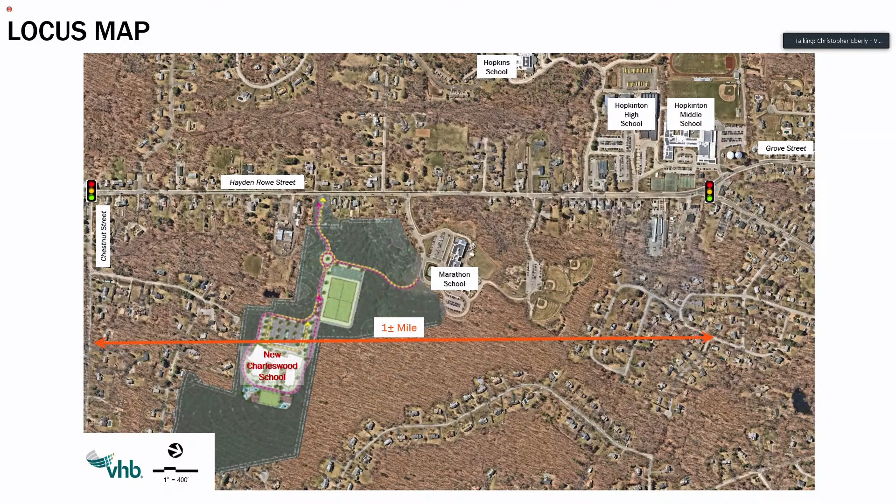If we can go to the next slide, please. Out of that process was a very focused review of the intersection of the Marathon School driveway and Hayden Rowe Street. We picked this intersection specifically because it's already serving the Marathon School, and when you look at the site plan for the overall project for the new school, we are looking at a cross connection between the two schools. So traffic doesn't necessarily need to leave one driveway and access the other school from Hayden Rowe Street—you could travel between the two schools via that internal connection.

That internal connection provides the ability to add additional traffic control at the location along this corridor that provides the most benefit for traffic flow on Hayden Rowe Street. You could consider a signal only at the new school driveway, though there are technical limitations for that. Based on our previous analysis, we determined that a change in traffic control at the Marathon School driveway would have the most benefit for traffic associated with both schools, while improving traffic flow along Hayden Rowe Street and pedestrian safety.

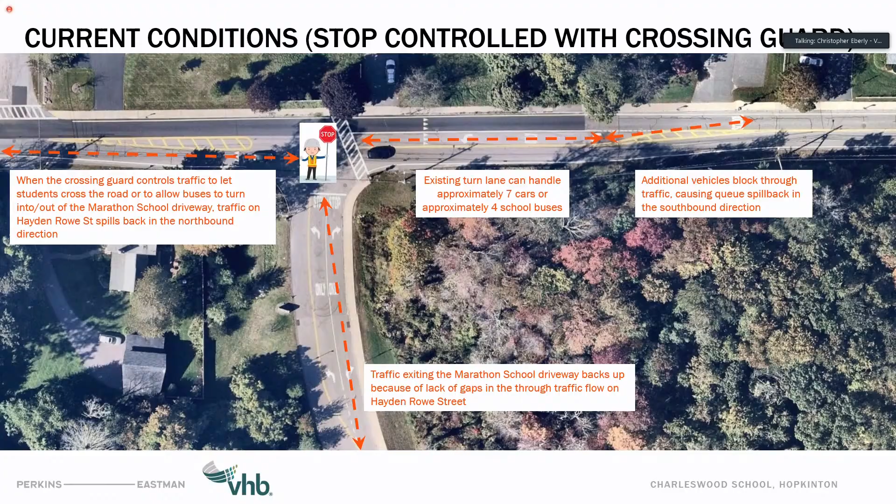There are a few other things we observed, and some of this is built into the traffic study we submitted back in July of last year. Item A is what I just mentioned—the left turn lane is inadequate.

With growth in student enrollment across the entire district—close to a 50% increase in projected enrollment over the next 10 years—there will be more school-related traffic on Hayden Rowe Street, and an increase in traffic just for Marathon School. Those future traffic volumes would need to be accommodated with whatever solution we come up with.

For the new school, rather than just relying on a cross connection and access to the Marathon driveway, our analysis established a need for an additional, unsignalized access for the school. That was one of the things we found with the traffic study.

There's a need for pedestrians to have a safer, more convenient crossing opportunity across Hayden Rowe Street. Today the full signals are a mile apart at either end of this graphic. So if a pedestrian needs to cross at Marathon School today, they'd have to activate the push button for the flashing light. It's not active control—traffic just has to follow state law and yield to pedestrians, but there's no requirement for vehicles to stop. You often see that happen, especially during off-peak hours, when traffic travels at higher speed along the corridor.

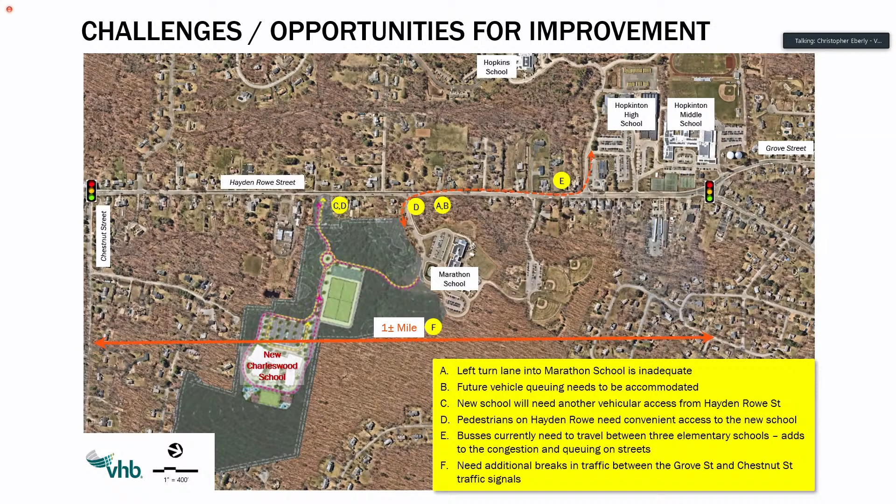So some of the other things we took into account when developing recommendations as part of the traffic study are listed here. For example, you hear the concern that school traffic is causing some of the congestion and backups.

But when you look at Charleswood School, or previously the Elmwood School, traffic start and end times, that's not when traffic on Hayden Rowe Street peaks. Hayden Rowe traffic actually peaks earlier in the day, in the morning, and earlier in the afternoon, when high school and middle school traffic is at its peak. So by the time elementary school traffic comes out onto Hayden Rowe Street, it's actually the churning traffic in and out of driveways that causes congestion, not necessarily just the volume of traffic.

So a solution that helps manage that churning traffic better would have a beneficial impact on the overall traffic flow on the corridor.

The second bullet talks about how, occasionally during off-peak hours, if a resident is turning off Hayden Rowe Street into a driveway or onto a side street, that wouldn't have a significant impact. But with multiple cars, tens of cars trying to turn into each of these schools, that congestion builds up and the queues spill out up and down the corridor, causing additional congestion.

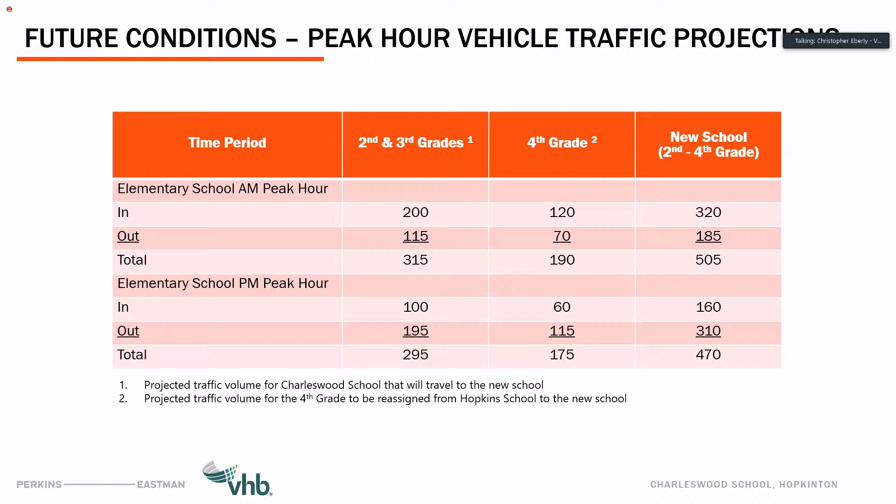Those numbers are pretty substantial, and that's what we're trying to accommodate with our traffic improvements. All these numbers on this slide are future projections going out 10 years, so these are not current numbers—they're future growth projections that include that 50% growth in enrollment.

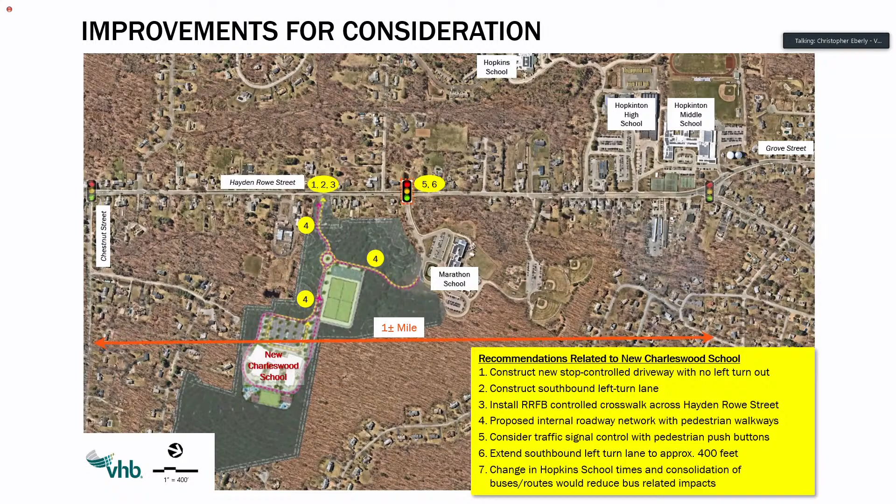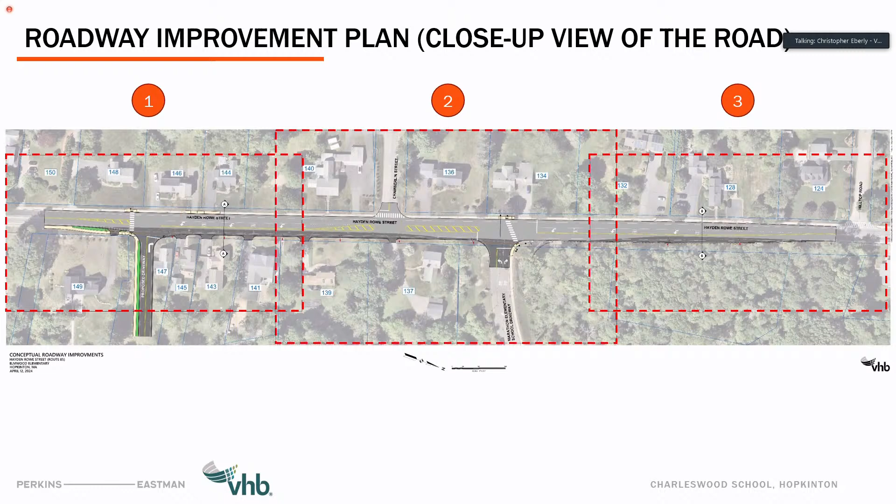If you go to the next slide. To get a better understanding of what these improvements look like, we broke up the plan sheet into 3 different segments, 1, 2, and 3. We'll quickly go through each of those areas. Segment 1 is near the new driveway, Chestnut Street to the left and Grove Street to the right of this slide. You'll see it's a right turn out only driveway coming out of the new school.

There's also a new left turn pocket shown on Hayden Rowe Street that would keep traffic wanting to enter the new school outside of through traffic, so through traffic would not be blocked by traffic turning into the new school.

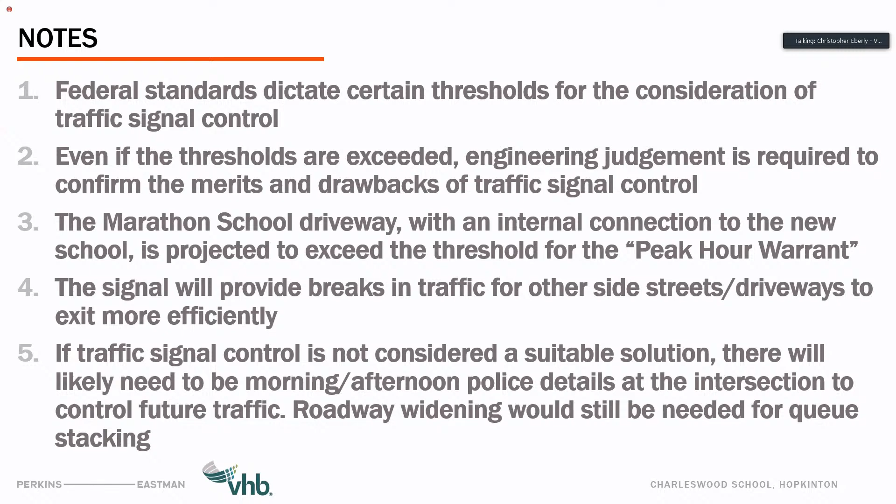If you can go — I think it's the next one, Chris — site layout. So you're talking about the roundabout and the cross connection to Marathon School versus coming out at the new driveway. Correct. So what percentage of our Charleswood students do we think live south? It's not just traffic living south — I guess it's also work traffic, right? Parents drop off the students and then they come out, and they're not going back home, they're going to work.

We looked at that extensively during the traffic study, not only for Marathon School but for all the school driveways up and down the corridor. What we identified is a 60-40% split — about 40% of traffic is oriented south, and 60% is oriented north towards Main Street. So when school lets out, the 40% heading say toward Forest Drive would come out and blend with 100% of Marathon traffic — they're probably not going to go through the connector, even to go right. All the Marathon traffic and some percentage of Charleswood traffic will come through together.

We did run more recent analysis as part of the site plan development for this project and spent quite a bit of time on it. I didn't get into that in this presentation since it was mostly about Hayden Rowe Street, but we looked at the geometry of each of the internal roadways. When you look at the site plans submitted for the project, you'll see turn lanes, flares, and widening — there are geometric variations, not just two parallel lines defining the edges of those internal streets. There's actual geometry on those driveways to accommodate the estimated traffic flow between the schools.

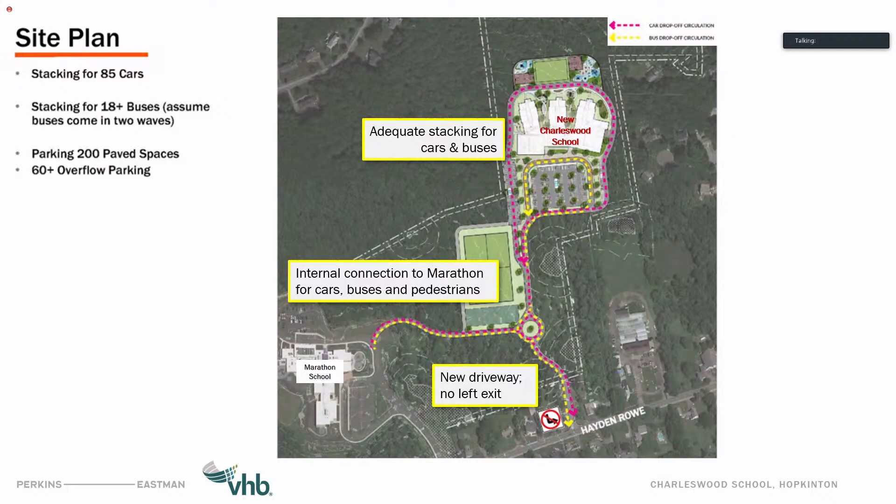Chris, if you could go back to that slide that shows the middle section. So you're talking about that yellow striped area in the middle? We did a great site walkthrough today, but this left-hand turn lane into the new entrance is a concern of stacking there, and if you were to use those dashed lines, that seems quite cumbersome. So it's a little out of my league in terms of knowledge.

Right now we don't see, at least based on the projected analysis, a need to stripe that yellow splashed area for a turn lane, and that's why we're showing it as gold and not as a turn lane. The time when that left turn at the new driveway gets used is, let's say, there's a long line of cars of parents going to the main school, and car 5 or 6 is heading to the new school. They don't necessarily need to wait at the signal to turn into the signalized intersection and use the cross connection. They can use the through lane and then use the left turn pocket farther down to enter the new driveway.

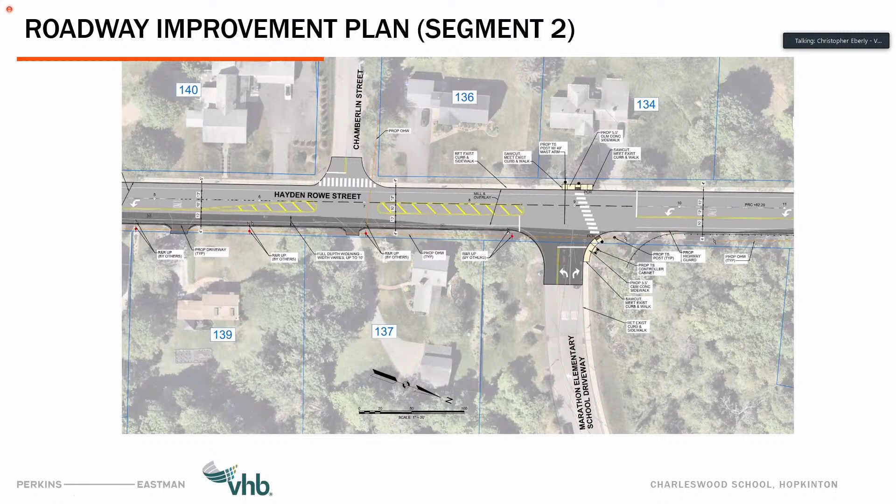The new one would be more than doubling that, about 130 to 150 feet today, the new length north of the signal. Comparing the present day at 5 to 6 cars to the proposed design of the new entrance at 8 cars - it's more than 8 cars. I think it was 8 cars on this side, Vinod. I think this side's 20, isn't it? Yeah, it's much longer. At the signal we'd have a much longer turn lane since that would be the first preference, but we wanted to have the ability for parents to use the unsignalized driveway if they choose. That's about 8 to 10 cars, probably more than 8, but somewhere in that order.

But it's a good amount of distance on that side, whereas this is cut in about half between the two. So it's at least 18, maybe 20 cars. For 400 feet, you're probably looking at somewhere in the order of 18 cars. Okay, so thank you, that makes a lot of sense.

Other questions on traffic as I cover for Tiffany before she becomes official chair?

We talked with the residents during the walk about the value that gives them, because one of the early concerns we heard was that going to get your mail can be quite the ordeal. By pulling back the shoulder and pulling back the mail delivery point, you can actually stand at the mailbox and grab your mail, and you've got a couple feet behind you before you're in the roadway, which is an improvement over what they currently have.

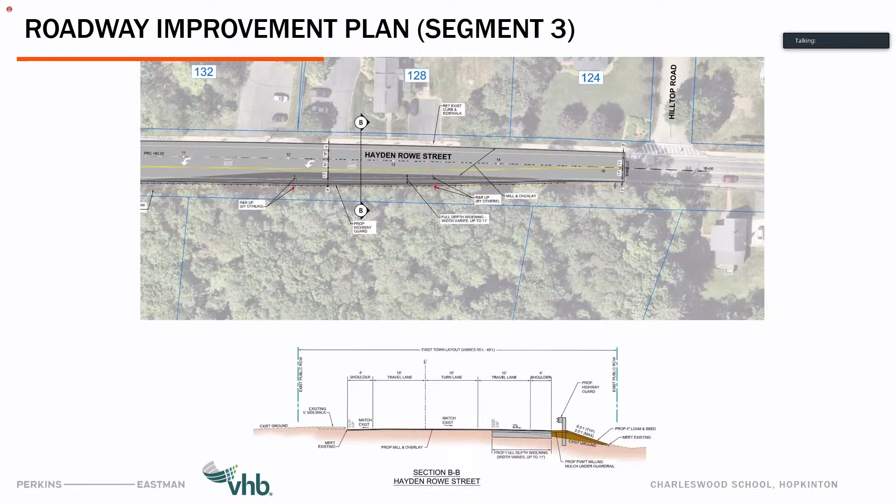Any other questions on traffic?

So our next series of items all relate to where we are in the overall project. Last week I distributed to the full committee the design development set, so you could see the design that Perkins has developed. What we're going to talk through now is where the cost estimates ended up, where we are from an overall budget standpoint, and also where we are versus where we were from a value engineering standpoint versus where the drawings are now, and some of the choices and options the committee has in front of them.

Starting with the design development estimates, we are under budget. We had AM Fogarty and PM&C both estimate the project. We met last Wednesday to reconcile, and at the tail end of that we were within 1%. That's $1 million, but that is less than 1%. So we were able to reconcile at 122,488,967 versus PM&C's 123,507,195. The MSBA has us use the designer's estimate as the estimate of record.

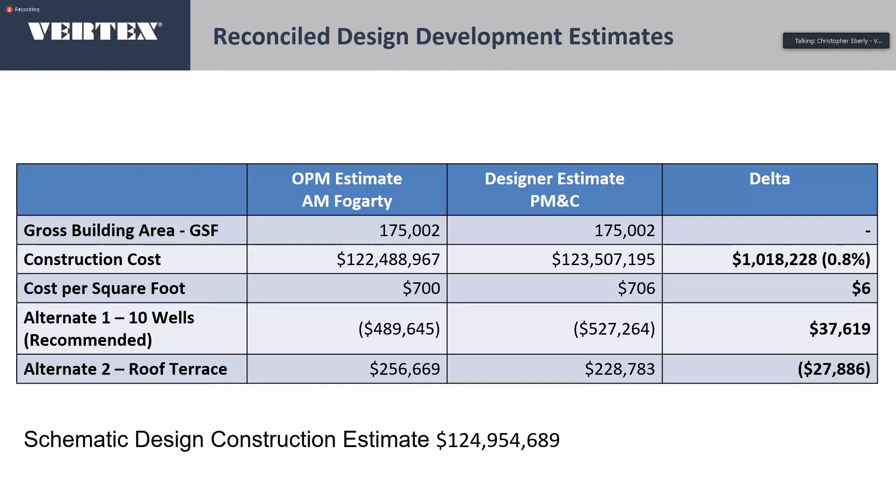So I wanted to take a look at where we were with sustainable schematic design alternates back when we were doing the value management prior to the bid. What you can see here in dark blue are the accepted alternates we made at that point.

Just to revisit those 8 alternates: we accepted wanting to try and keep the tile in the corridors, but we didn't want to raise the budget to do so. We wanted to use just stone dust at the overflow parking to save $200,000. We wanted to remove irrigation from the playing fields, and raise the grade at the playing field to use some more loam to keep the cost down.

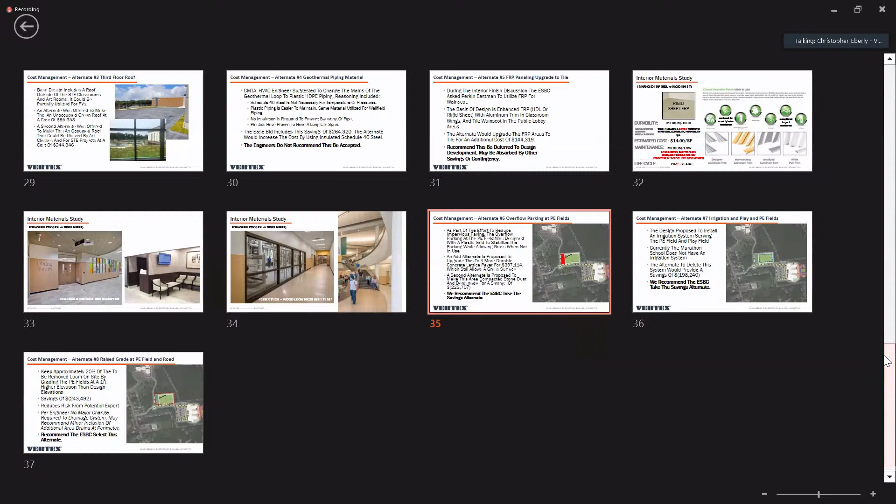I gotta move this along. What are we gonna get? There is a Bruins game. Missed one meeting. I think there's one more, so we got a solution.

The last one was restoring the additional grade. There is three feet of depth of loam that we have not laboratory tested to confirm anything about it yet. So you have a lot of loam that you need to export as part of this project.

Spent a fortune getting rid of loam at Marathon. So if we could use it here, as opposed to shipping it - it went to New Hampshire or some crazy place.

I forget, you mentioned we voted against it because of steps that would have to be added. No, you actually voted for it. And it was not included in the design. That's why we're bringing it up, because you voted for it at schematic design.

And the design kept the bid grade in what they're currently proposing. We are preparing the planning board submissions and the Concom submissions and everything else. So we want to restore that decision that the ESBC made. Now would be the time.

Does this 243,492 include the ramps, railings and all the other stuff that are gonna be required, probably needed to do this? I thought they had a way around that when we discussed it at the time, but it was never developed, so we don't know. I think you're gonna pay more getting rid of it than accommodating the increase, given the distance you have available.

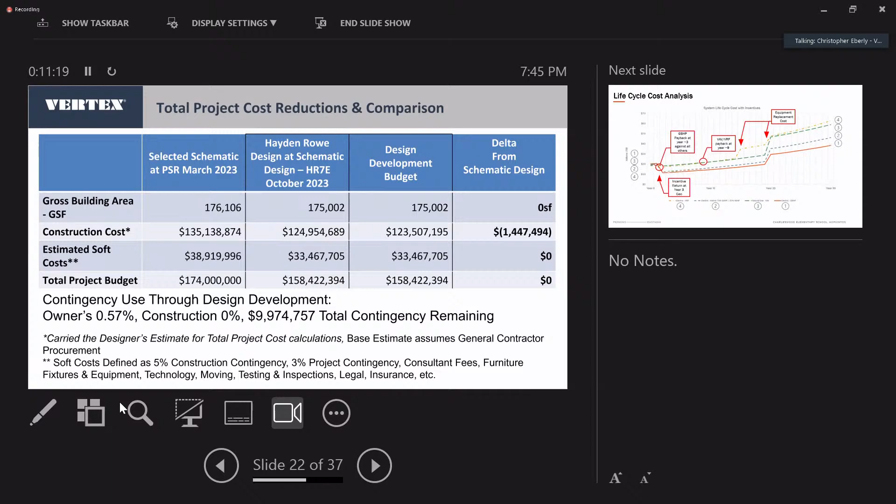Life cycle cost—this is going to be part of the DD submission, so I wanted to bring it back out. I gave you all a copy of it. This largely revisits a lot of the things we've discussed at length as part of this committee about how the ground source electric heat pump system we're pursuing does have a high initial cost.

But it's more than offset by the varying incentives that are out there, as well as the long-term operating costs. It produces a flatter curve over time because there's less maintenance, since so much of your cost is not in fuel you need to bring in, but in using the earth as the fuel source.

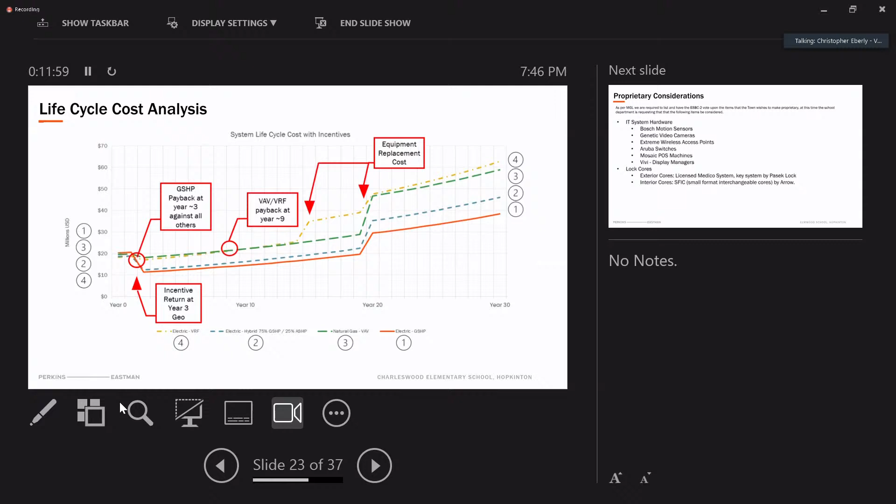Proprietary concerns: as part of the mass procurement laws, you're typically asked to have 3 bidders for everything you pursue in a public bid. The idea is to promote competition because that ultimately gives you the best price in the eyes of the state.

That is very true, except that when you operate a large system—let's say you're a DPW and you have things throughout town that are all the same make and model—you carry a lot less spare parts than if you had different things in every place. So arguments like that are typically made for using proprietary materials.

In the state of Massachusetts, you are permitted to use proprietary materials if the awarding authority makes an argument that those proprietary decisions are necessary, and in the case of a public body running a project, takes a vote to pursue those proprietary materials because it's in the awarding authority's best interest.

In this case, it most likely relates to IT system hardware and to the locking system the school system currently uses, because with the IT system hardware, there are compatibility issues and established vendors already used in multiple campus buildings, so that consistency is a valid argument.